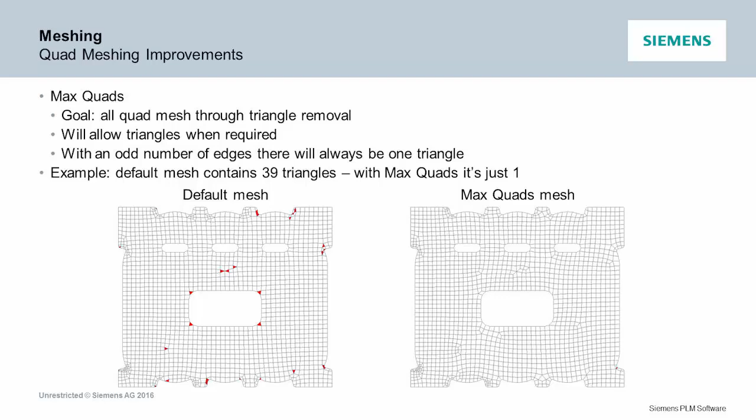We have customers now that want all quads no matter what. So we looked at a couple different ways of doing this, but what we were able to do is take the existing mesher and write some code with a real high-speed data structure. It knows the connections in the mesh, and we just run around, move the triangles around, connect them up, and basically take them out of the mesh.

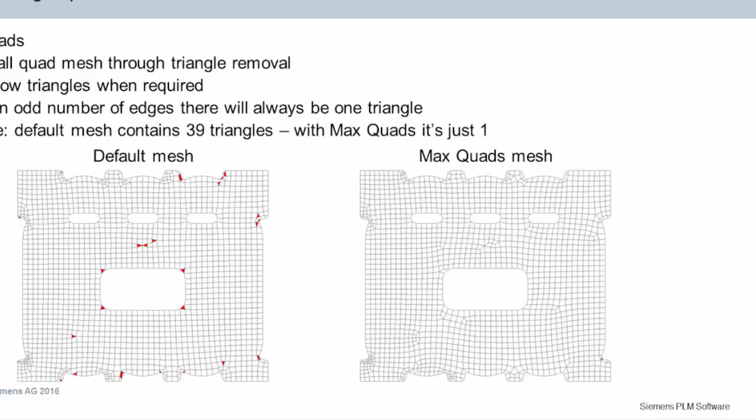So here's the default mesh, and if you don't turn on max quads, this is what you still get. You turn on max quads, it takes those triangles out, and since there's an odd number on the periphery here, you have to have at least one triangle. But if you change that to one mesh size, you can get an all quad mesh - if you want an all quad mesh now, you can get one.

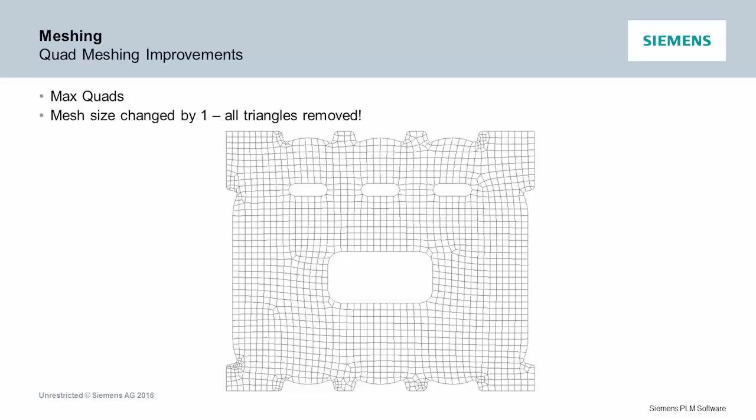So here's that exact same part, and I'll do mesh surface. I'm not going to let it just remesh and resize right now, but here's the default mesh. And if I go under elements by shape, I can turn on the highlighter and see there's 8 triangles in there. All you got to do is turn on max quads, pick it again, and now there's 4 triangles.

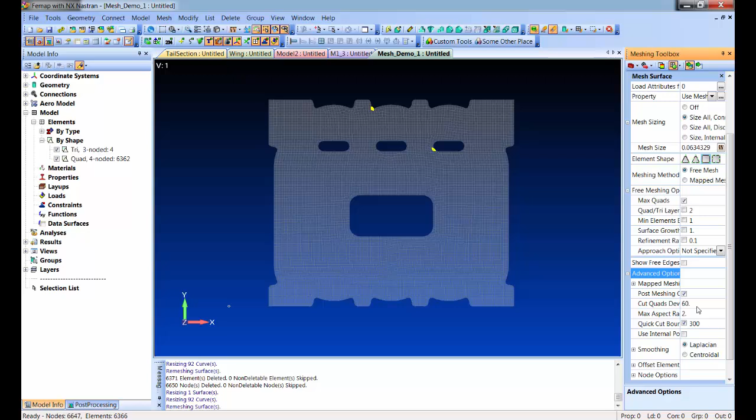Now it still honors the maximum aspect ratio. So as long as you tune that up a little bit, you can then go to no triangles at all. And if you change the mesh size, let's just see what it does here - a couple triangles, but again those are along the same thing.

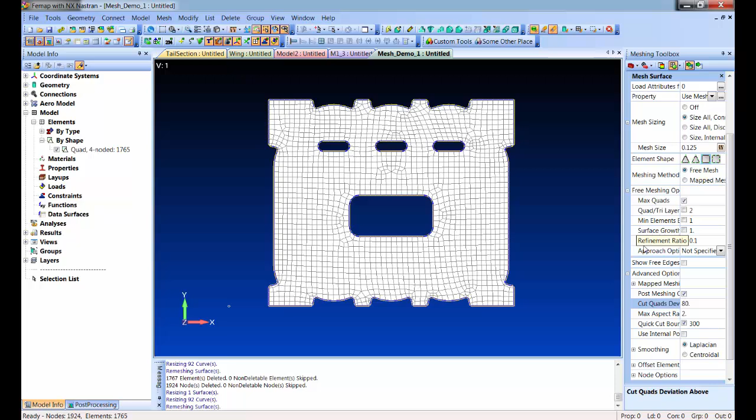If you allow it to get a little looser on what it'll take as a quad, you can get all quads. Now you can combine this with the layers and get a real nice layer around the edges and then an all quad mesh. And if you keep juicing up the layers, you can do some other fun things where you run the layering in a little bit more. But you can get just about any mesh you want - they're all quads if you want them now.

The layers actually tells the mesher to pave one almost perfect layer around the edge. And I told it now 10, so it keeps trying to pave in. Once it gets close to something, it stops. And then anything left over gets the free mesh.

Another thing we did - if you used our triangle mesher, it always had a great growth thing, so when you're tet meshing something, you could tell it, I want a tight mesh around any boundaries or periphery, and then let the mesh grow out towards the middle where there's no stress concentrations anyway. The quad mesher didn't do that - it was kind of constant across the mesh, it wouldn't grow in the middle.

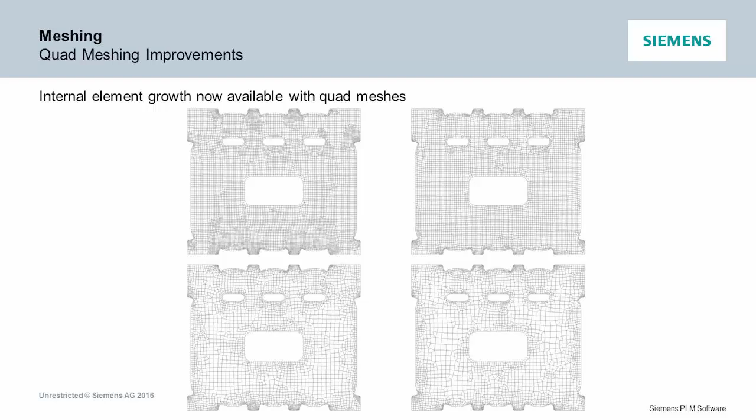We've now turned on the grow in the middle for the quad. So you can now achieve kind of that same effect where you go ahead and tighten up a lot around stress concentrations and such, but let the mesh grow further out and get your node, degree of freedom count down for the model. So that'll help get models smaller and better answers.

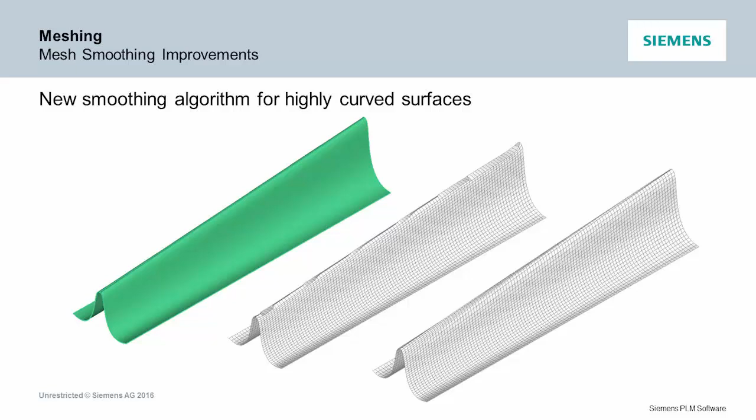We've also come up with a new smoothing algorithm. Our old smoother does a great job if your geometry, your mesh isn't super curved. But where it was curved, sometimes the smoothing would cause it to relax - it was like a relaxation thing, the smoothing, so it would kind of droop. We recoded that with a new, more 3D algorithm, so you now get a better smoothing of meshes on highly curved structures.

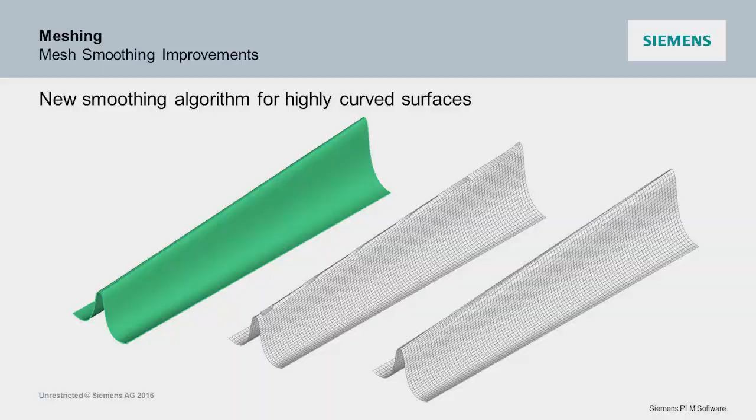So let's say you're given this mesh, there's no geometry, and for some reason you want to model some stress concentration here and maybe get some better stress data. It'll be a lot of work to make this happen with just regular manual meshing or whatever. So George wrote...

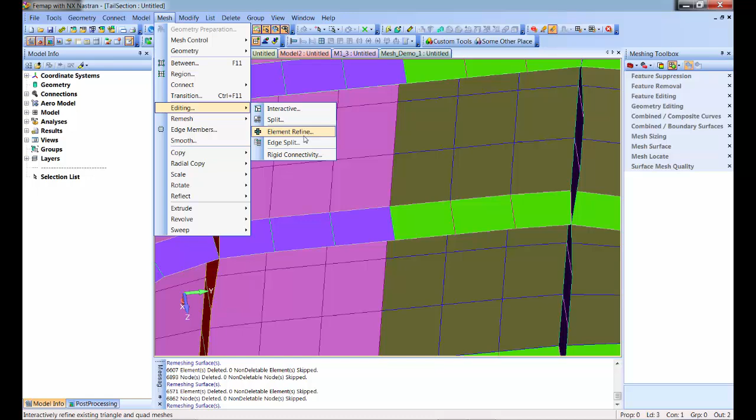Editing element refine. And it's as easy as you just pick a couple elements - this is a preview, it's not doing it yet. And you can grow that selection. And when you're done growing that, you hit OK, and you've got a refined mesh.

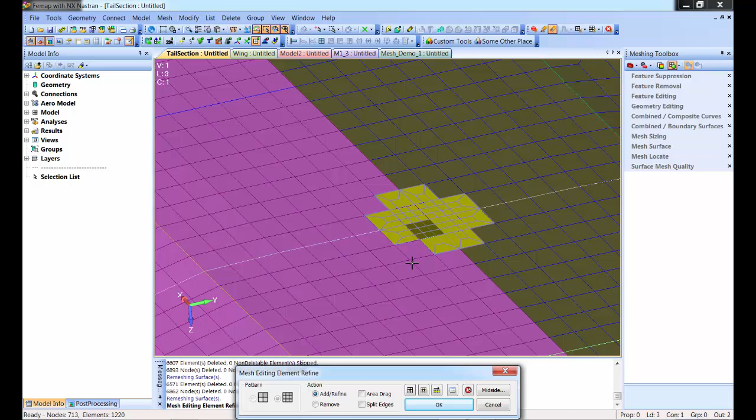And I'll do it again. I think I picked one down on the inside. It's got to add and remove too. So if you didn't like what you picked, I can remove like that one, and I can now grow it.

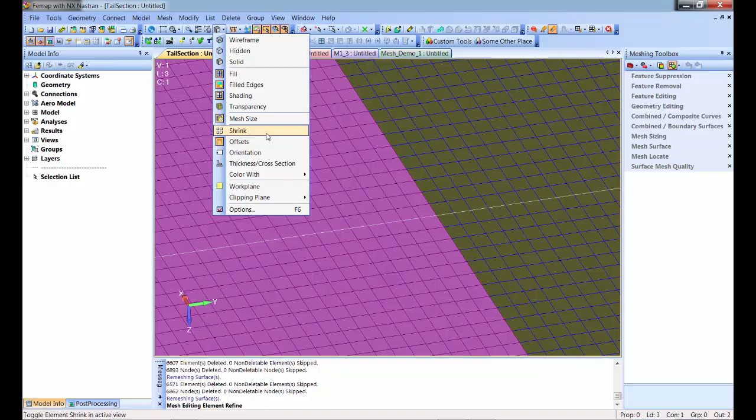Now the real neat thing that you don't know is going on here, and I'll show you when I turn on the shrink. There were little beam stiffeners around this model. It's splitting every stiffener. It's propagating pressure loads. It's propagating, like if you had a laminate definition, the material angle for the split elements matches the one that was the original element. Constraints, if there was a constraint between the two nodes and they're the same, it would put a new one in the middle node. So you can now pretty much refine meshes instantaneously.

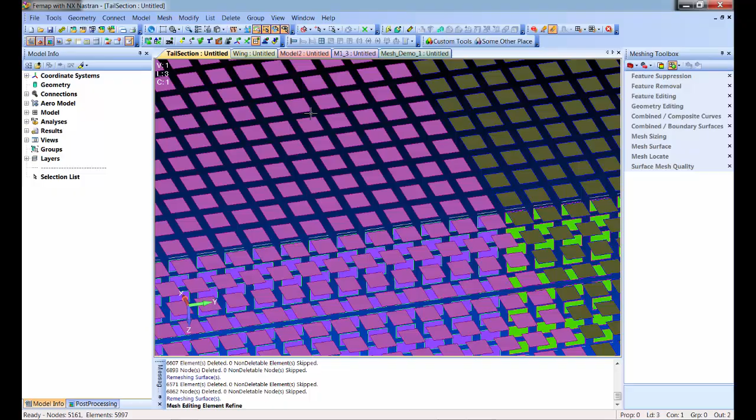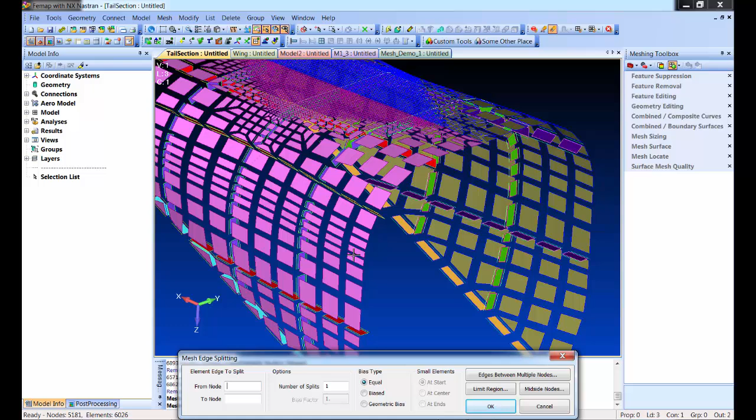And I just want to make sure everyone's seen it, back in 11.2, we had another one that is also just handy. Under that same place, there's a mesh editing edge split, and you can just pick two nodes, and it runs through the model and does the same thing. But it propagates it as far as it has to keep everything connected. So you can pretty quickly refine a mesh with these tools.

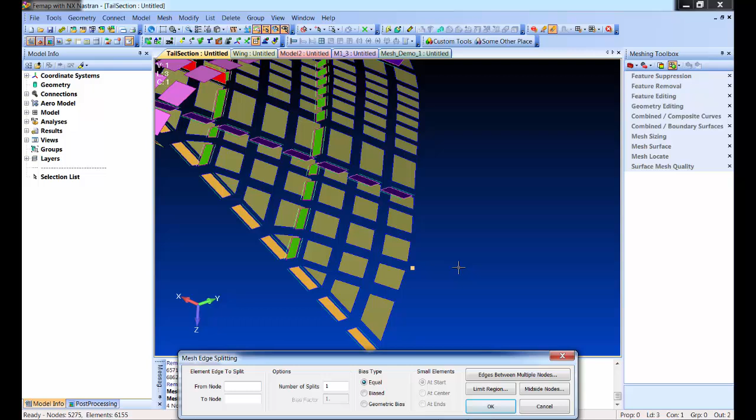And this one in version 11.3, we added a multi-pick too. So if you were doing that with multiple nodes, you can now pick multiple. It'll go through and do them at one time. And this does the same thing, splits the beam, properties, pressures, constraints, anything. Just another quick example, T-junctions, whatever's connected is going to stay connected. It gets it all done.

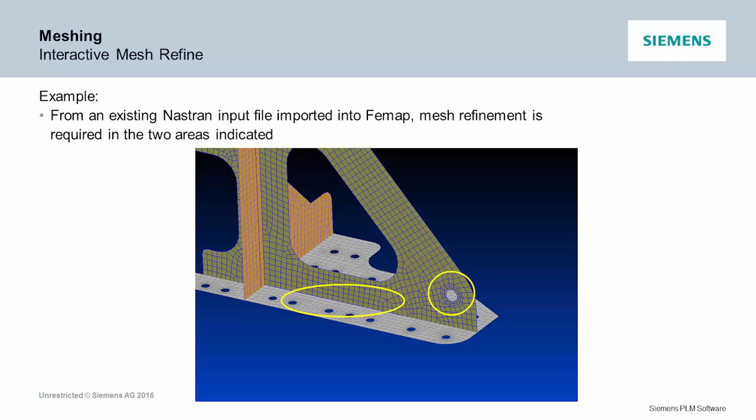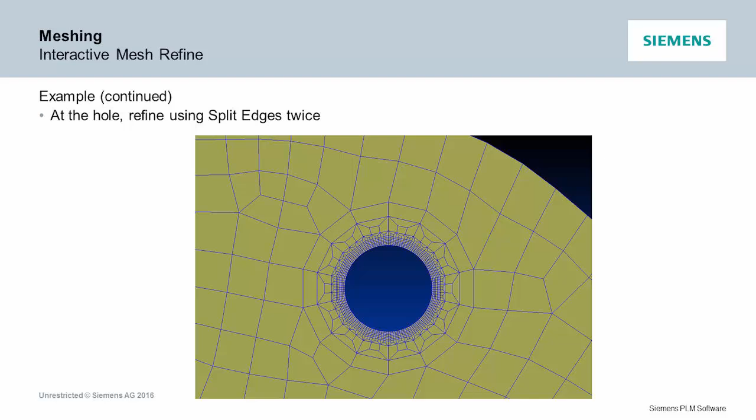So in the same model, similar to the plane model there, you pick a region, grow it out wherever you want to. And there's also just a drag. You can just wing the mouse around and highlight elements and refine. If it's just an orphan mesh, it doesn't do any projecting or anything. But if it does have geometry, it will project and keep everything smooth. So you can quickly do some real nice mesh refinements.

Another enhancement we did in this release, we've always had these mesh hard points in the surface. So this part originally, it's a mid-surface thing, and it had some holes. We turned the holes into points so that the mesh would get a node right where you need to constrain it. And if you meshed it, you got a node everywhere you had a point.

We had an issue. If you used our meshing toolbox to split this up and do other things to get a better mesh in certain areas, sometimes you'd split a surface in half, and the point that was pointing to the one surface is now pointing to a different surface. Now if you make any edits, the points automatically get reassociated to the new stuff, and when you remesh, your hard points are still going to be there. It's just much better when you're using that tool.

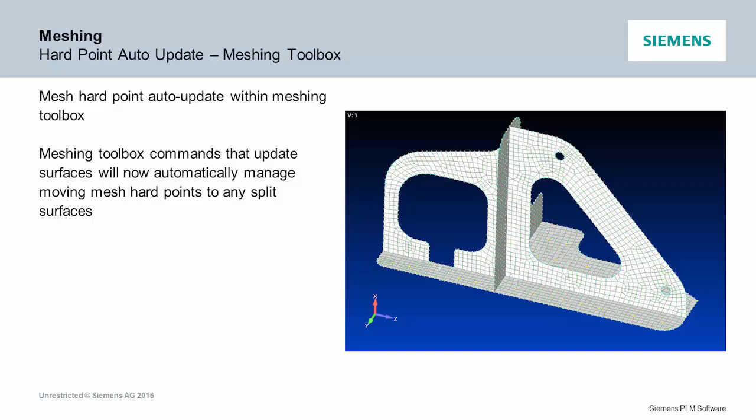Another thing we've been working on in Femap, we added virtual geometry or topology on top of solids, but a lot of times we get these parts in that have extraneous points, and sometimes even extraneous little sliver surfaces, which when we go to mesh, we take every little piece into account, we mesh those. Sometimes you get little sliver elements. And we had tools in Femap where you could combine them together into a virtual surface and mesh on top of that, and you get a much better mesh. So it gets rid of all the little gaps and slivers. But it really wasn't fixing the geometry.

So for another customer, we now can actually take those points out permanently at a Parasolid level and clean up the geometry and take out edges so you get a continuous new surface. The nice thing here, it does the same end result at meshing, but now you get a nice single piece of consistent geometry. You could use it for other splits in Femap, or you could kick it out to another program if you needed it for something else. But if you're running into dirty geometry like this, it's just another tool in your toolbox to clean that stuff up and make really good meshes.